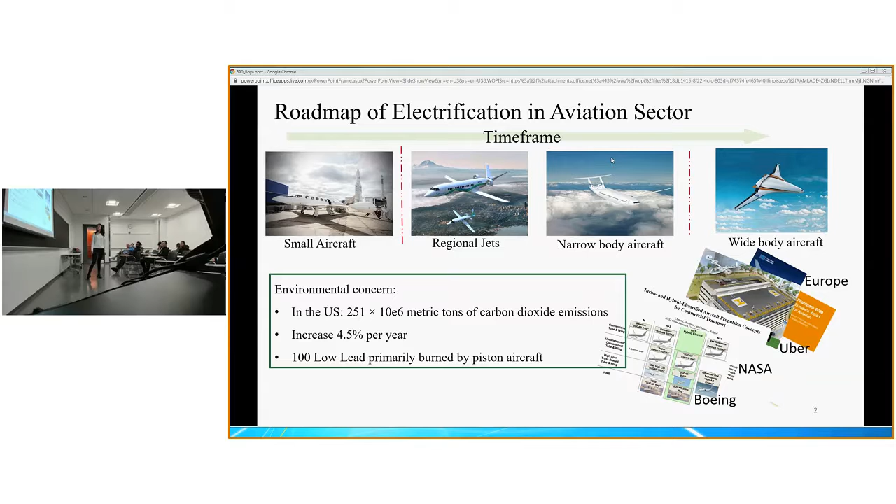It will start with small aircraft. Some electric small aircraft already exist today, such as the Alpha Electro and Alice from Eviation. Alice. It has also been identified that short-range opportunities exist in the regional jet and narrow-body aircraft sections. But for wide-body aircraft, electrification will not happen in the near future.

The fundamental challenge comes from battery technology. Currently, battery specific energy is around 50 times lower than jet fuel specific energy. We can understand it by two examples. If you want to maintain the same range of an aircraft, then the maximum takeoff weight will increase by 49%. But if you want to maintain the same takeoff gross weight in your aircraft design, the maximum range achievable will decrease from around 3,000 miles to 384 miles.

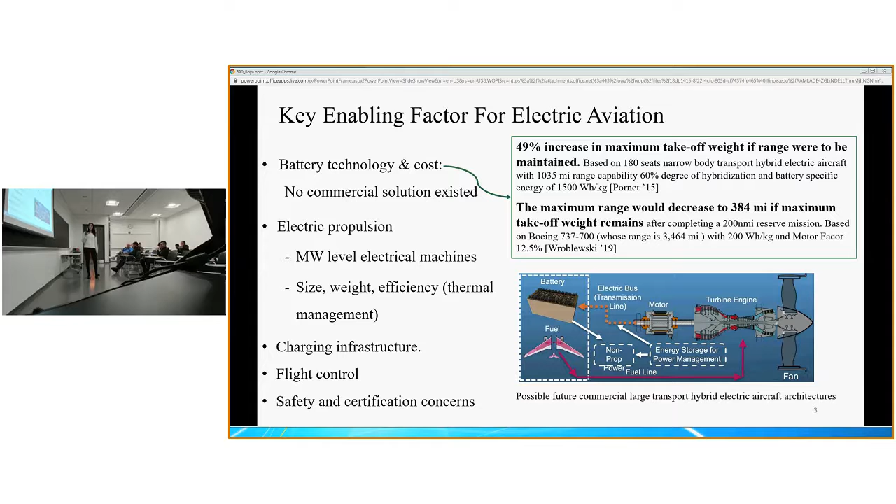Besides the battery, when you look inside hybrid electric aircraft propulsion, challenges also come from megawatt-level motors. And outside the aircraft, we also need charging infrastructure, flight control, and safety and certification processes to make an electric aircraft take off.

Excuse me. Yeah. Could you go to the other side so we can see this slide? There we go. Thank you. Kevin doesn't need to see. He's got a screen there to watch.

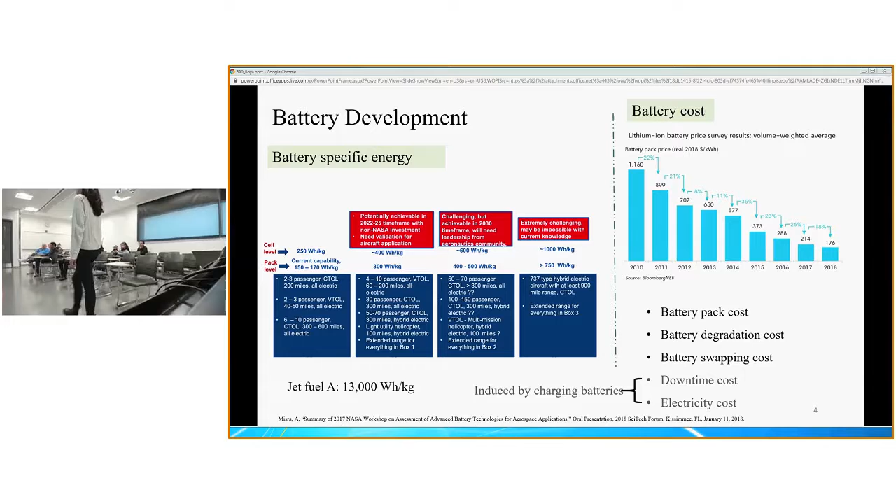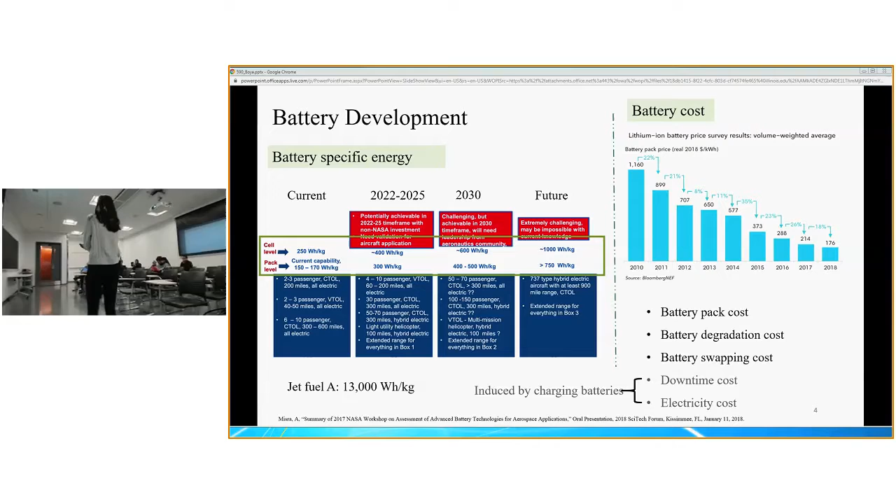Yeah. And to determine the electric aircraft rollout paradigm, we also need to look at predictions of battery development in terms of battery specific energy and battery cost. The left panel shows the prediction done by NASA. Currently, battery specific energy is only 250 watt-hours per kilogram, and the 400 level is an achievable goal by 2025. The 600 level is achievable by 2030, but beyond 1,000 will not happen in the near future. In terms of battery cost, it has reduced significantly in the past decade, which will help make electric aircraft realistic.

Now suppose we have solved all the technology obstacles, but electric aircraft may come at a premium cost. Suppose we have a fleet of conventional aircraft. A realistic way to integrate electric aircraft would be to only replace a small portion of the conventional jet fuel-powered aircraft. But here we want to perform a worst-case analysis and suppose that whatever flight is feasible to be replaced by electric aircraft, the electrification happens.

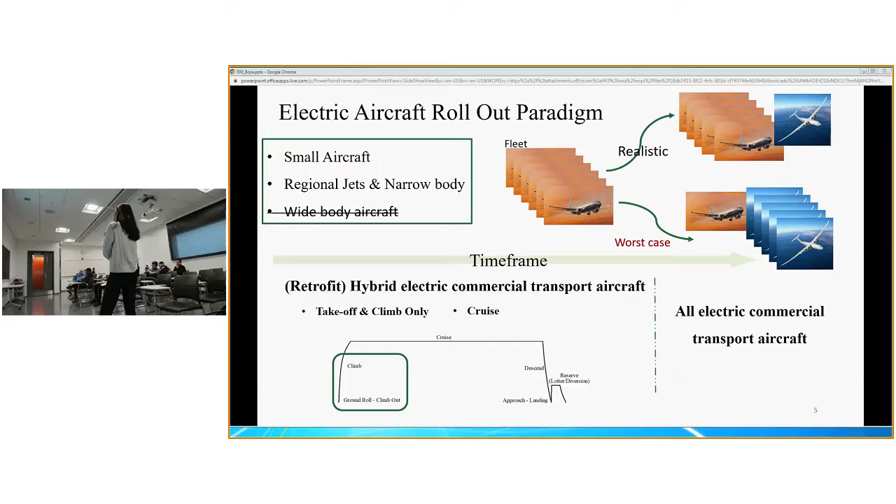It has been identified that hybrid, in particular retrofit hybrid electric commercial transport aircraft, will happen before all-electric commercial transport aircraft. And even in the hybrid electric section, we might first use electric propulsion during climb and takeoff only, before we use it to propel the whole cruise mission.

Because of the penalty of battery specific energy, the maximum range achievable of an aircraft is reduced greatly. So we need to decide on the set of flights that can be covered by electric aircraft. For example, we plot a histogram to demonstrate how much flight demand can be covered by electric aircraft.

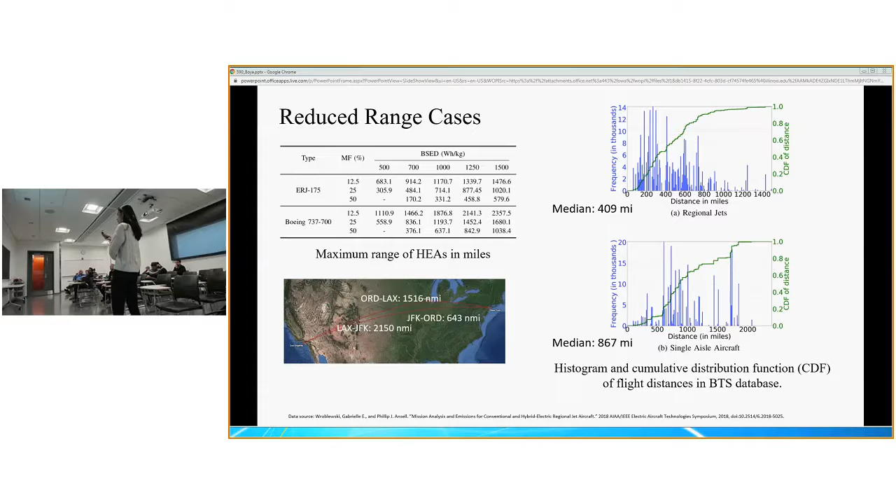It is shown that for the regional jet section, the median flight distance is 409 miles. And for single-aisle aircraft, the median flight distance would be 867 miles. And if we compare that number with the top left chart, we would notice the proportion that can be covered by electric aircraft is reduced greatly. So we need to reform our data set.

Here I will use an example to demonstrate how to calculate the energy consumption for one flight leg. We use a metric named the battery energy consumption per passenger per mile. So the battery energy consumption for one flight is the number of passengers times the flight distance times battery energy usage per passenger mile. Our data set provides us with the tail number, from which we can get the aircraft model and then determine the battery energy usage per passenger per mile.

Under our assumption that the flight schedule remains the same as the current flight schedule, we can calculate the charging power needed by the energy consumption for one flight divided by the time duration during which the aircraft stays at the airport. Could you tell what is the typical watt hours per passenger mile?

It differs between regional jets and the single aisles, and also the hybridization level. For example, for 12.5 hybridization level and also under the assumption of battery specific energy being 500, the watt hour per passenger mile is around 30. How do they compute that?

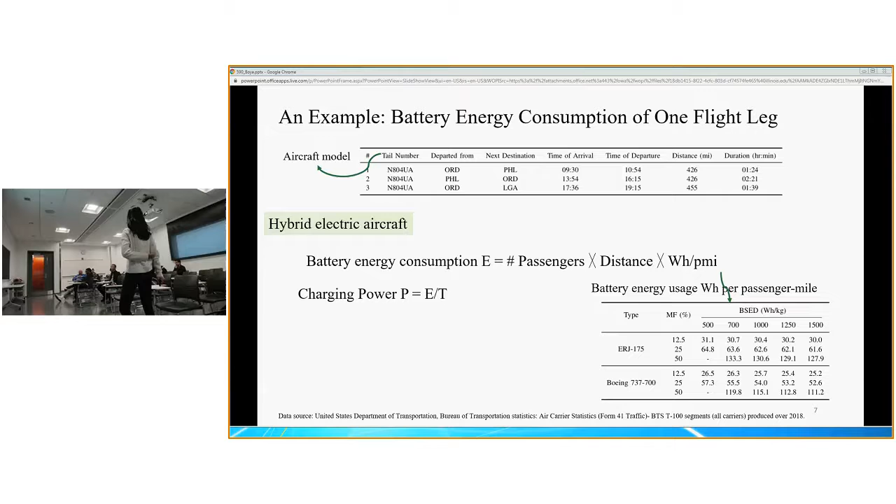Similarly, we can calculate the fuel consumption of one flight leg. Here we need this number because it's a hybrid electric aircraft, so it will also consume jet fuel.

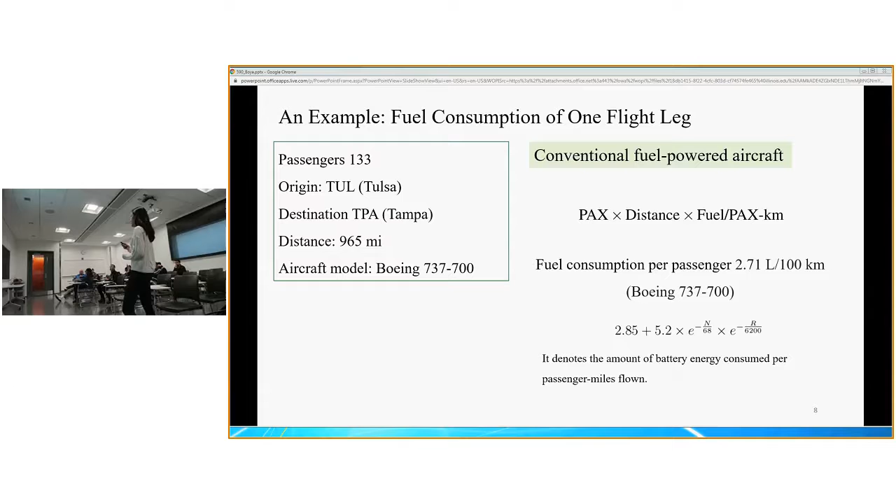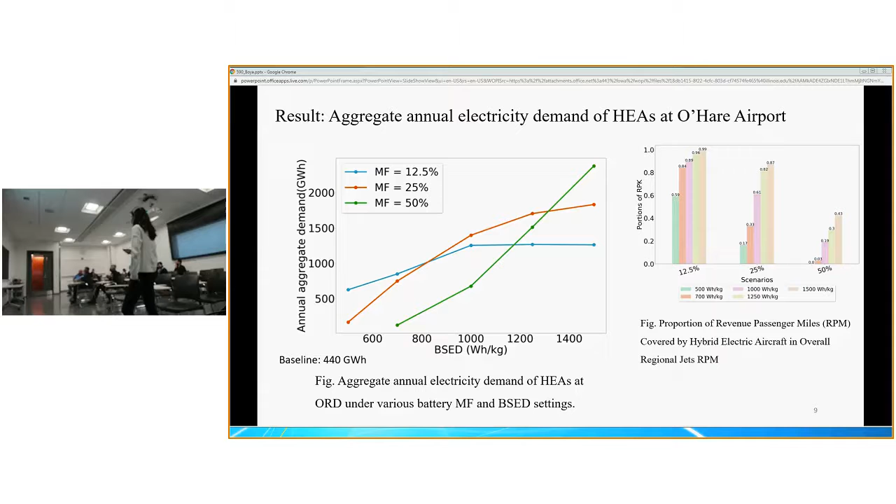We further analyzed the daily peak demand at O'Hare International Airport. For example, when we have a motor fraction of 12.5% and the battery specific energy of 500 watt-hour per kilogram, the median of peak demand would be around 70 megawatt. When compared with the average demand at O'Hare in 2002, it's just 50 megawatt. So the daily peak demand will increase significantly when we integrate the hybrid electric aircraft.

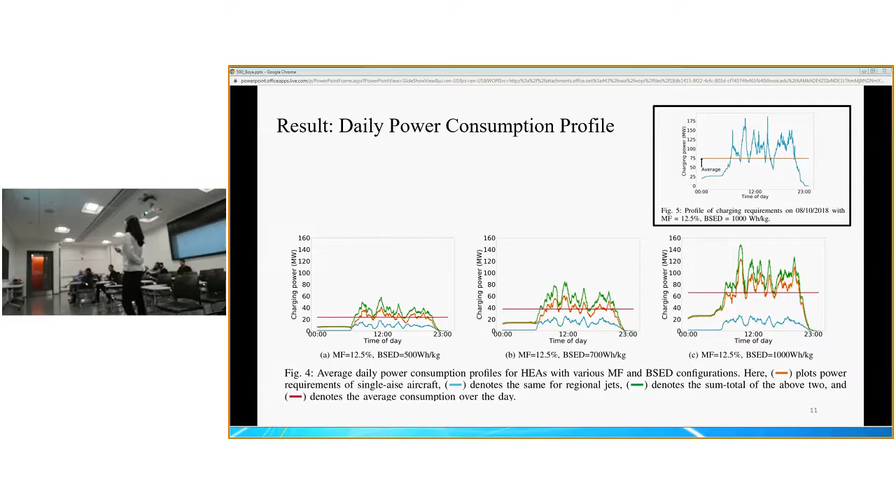And if we just look at one day on the right top panel, we would notice the average daily demand would be just half of the daily peak demand, which gives the opportunity of scheduling the hybrid electric aircraft charging scheme.

Apart from power requirement, we are also interested in how electric aircraft are going to impact the jet fuel industry. So first, I break down the fuel consumption in 2018 by aircraft class, flight distance, and aircraft model type. Since we are only interested in regional jet and narrow-body aircraft, we notice they consume around 50% of the commercial transport aircraft fuel consumption. And because the annual travel demand is going to increase, we make the jet fuel demand projection to the year 2050.

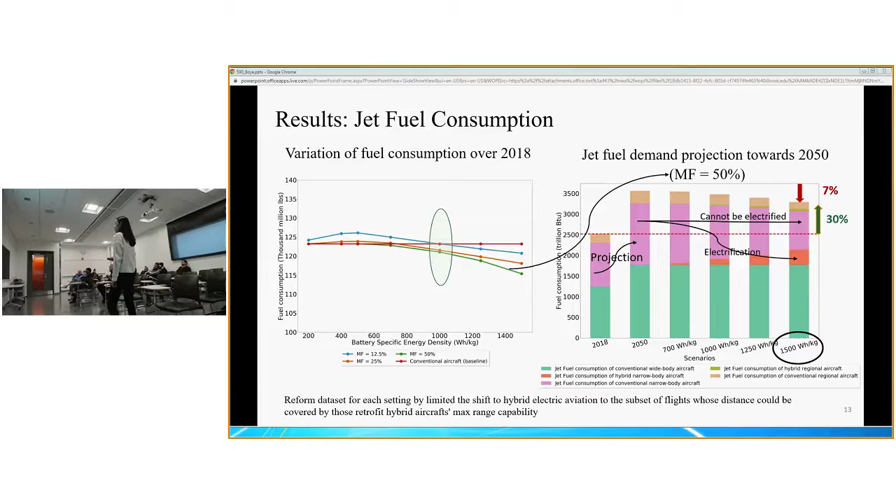Under this scenario, the jet fuel demand will still increase by 30% compared with year 2018, and will decrease only 7% compared with the 2050 case where no electrification happens. This implies aviation will still rely on jet fuel. So far, people have been talking about electric aircraft helping reduce carbon emissions. So we analyze how much carbon emissions reduction can be achieved by shifting to hybrid electric aircraft. And our result shows it can only be reduced up to 3.6%.

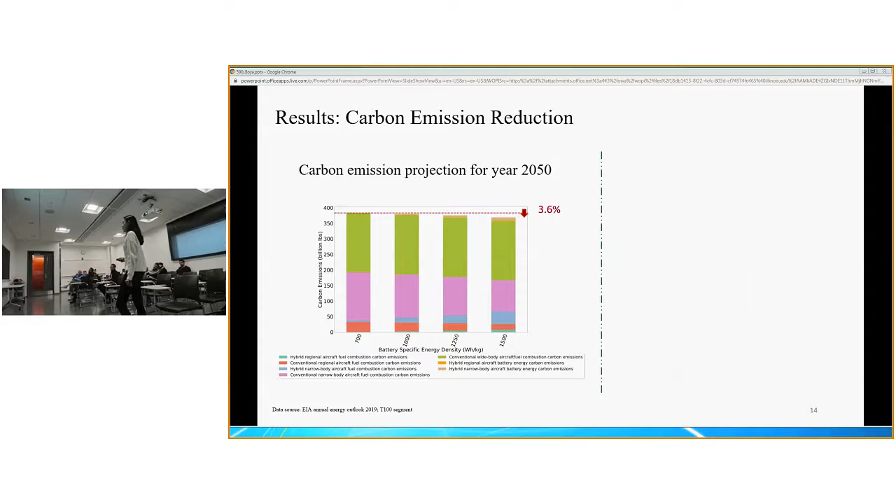But if we conduct the same analysis by replacing the hybrid one with an all-electric commercial aircraft, the carbon emission potential is more optimistic, as it can reduce up to 56% of carbon emissions. A few things to notice here: a better situation can be envisioned with an integrated design method of electric aircraft and also a lower carbon footprint on the electricity generation side.

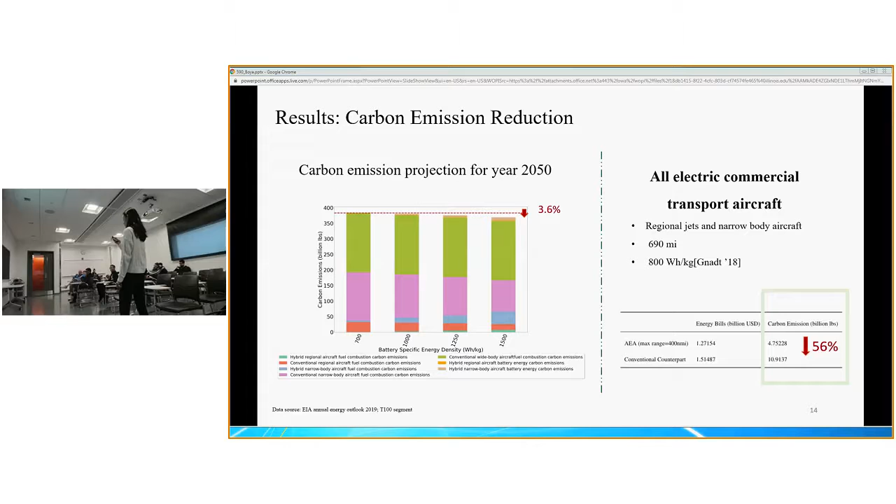And as I have mentioned earlier, the timing of electrification is very important. NASA has predicted a 400 watt-hour per kilogram battery is an achievable goal by the year 2025. So we try using this near-future battery and only use the battery as energy source during takeoff and climb. Under such case, we perform the same analysis, and it shows the daily peak demand is much milder compared with the hybrid electric, where we use battery as energy source during the whole flight mission.

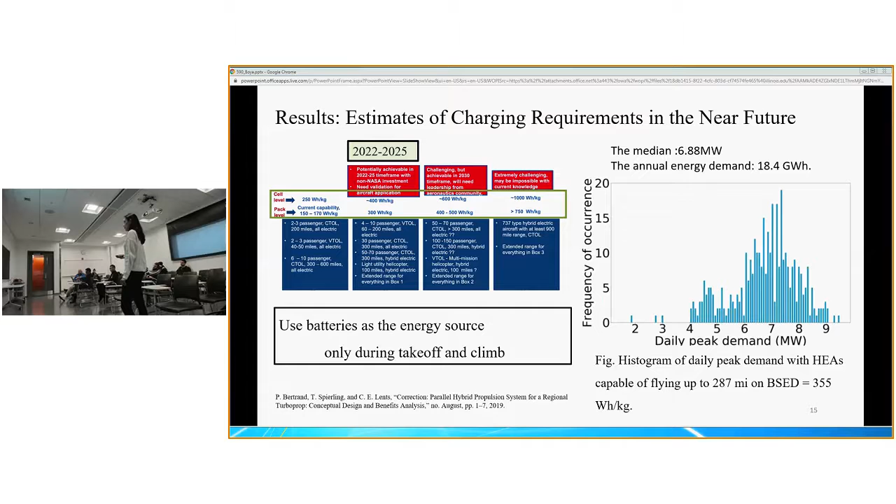To sum up, because of the timing of technology development, in particular the battery-specific energy, in the near future case, where the battery is assumed to be 355 watt-hour per kilogram, if we only use the battery during takeoff and climb, this will not be a huge challenge for the current power grid. But with the improvement in battery-specific energy, we might want to use battery as the energy source during cruise, and our analysis shows there will be a substantial increase in peak power demand and the total annual electricity consumption.